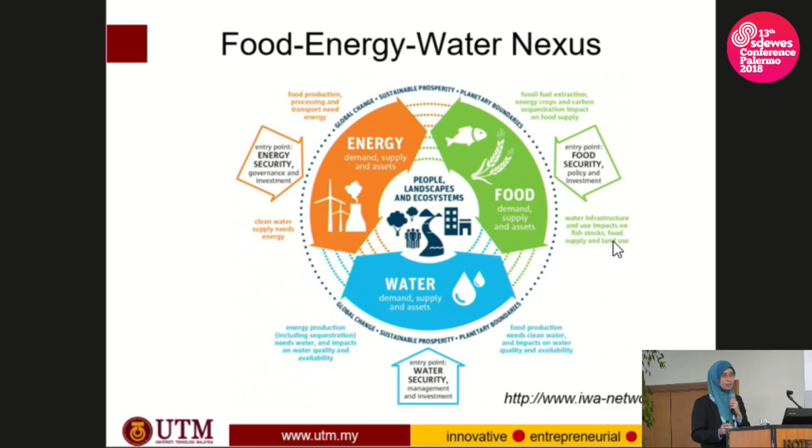Water is also very important for all food products, for agriculture, plantations, and so on. At the same time, food, like biomass, contributes to energy, and agriculture also goes back to the water supply chain. So taking care of water is also very important, because we'll also be taking care of the whole food, water, and energy nexus that many people are talking about.

So that's about the importance of water, maybe something you have heard in so many lectures. So let's look into the water cycle. How do we get clean water in the first place?

Normally we have a water supply, a source of water. It could be a river or a lake. To have clean water, it needs to go to a water treatment plant, and then after the water is clean, it will be distributed to the consumers. The water is utilized by domestics, agriculture, industries, and so on.

After water is used, we generate wastewater from the usage. This wastewater needs to be collected and sent to the wastewater treatment plant before finally being discharged back to the water sources. So these are the common water cycle steps to get clean water and how it goes back to the water source.

We mentioned there are 7.6 billion people now, and water is getting more polluted. So what could be the solution to solve water issues or water scarcity in the world? Could it be that we need more water? Could it mean we need to find more alternative water supply?

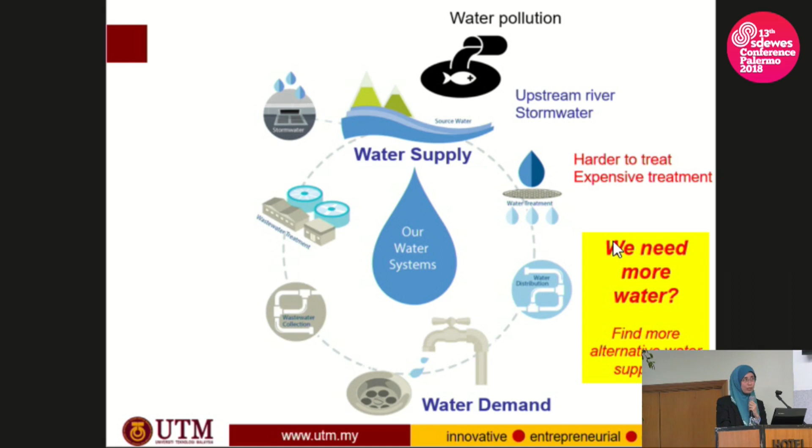If we look at water supply, it could be river and stormwater, as I mentioned. But the issue now is pollution, emerging pollutants, and many other things going into the water, which makes it harder and more expensive to treat, especially the emergent pollutants. Sometimes we throw antibiotics and other things into the water, which is very hard to treat. We have superbacteria and so on, so many things to consider when water is being polluted.

People also look at other alternative water sources like groundwater. Groundwater is a good alternative, but if you over-extract it, you incur long-term problems in the future, because water is actually being replenished inside the ground. When you extract too much, it doesn't go back to the river, and you'll have long-term problems with plantations, and then holes forming in the roads and so on.

People have also been talking about desalination, another famous technology. Desalination is great, you can use seawater, which is very abundant, almost everywhere. But the problem with desalination is energy. It's very energy intensive, requiring about 8 to 10 times more energy compared to treating surface water.

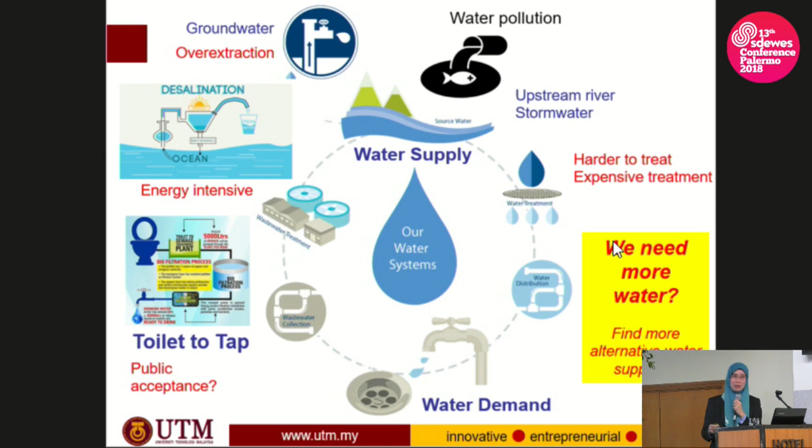Another alternative water source people talk about is wastewater reclamation. Maybe you've seen the advertisement where water is flushed from the toilet, goes to treatment, and then suddenly it comes out of your water tap and someone is drinking it. This is wastewater reclamation. It's good, but the problem is public acceptance - not many people, after seeing water flushed down the toilet, have the nerve to drink reclaimed wastewater. So although it's cheaper compared to desalination, the public acceptance may be lower for this wastewater reclamation.

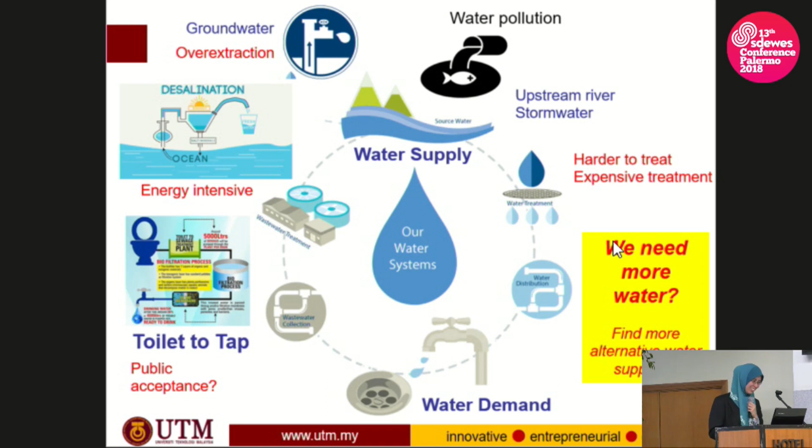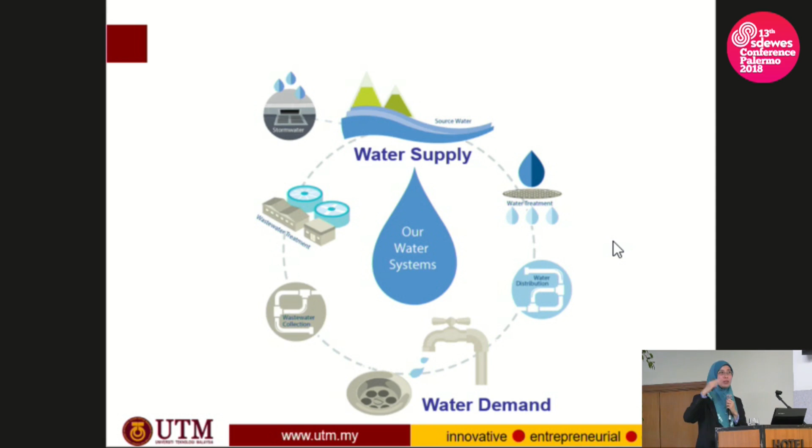Okay, so we talk about water supply. We have growing population, all the products need water. And we have so many water supply technologies which I have mentioned, but water supply is only one part of the story. The other part is the demand side. You can have all the alternative water supply, but in the first place maybe you do not need that much water supply. Maybe you can try to reduce the required water consumption for all the products first, so that you don't need to build such a big desalination plant or reclaim too much wastewater.

So water demand management is very important, and you have to consider it when you are doing planning. Don't just plan building a bigger desalination plant and so on. Plan also what you should do in order to reduce the water demand side as well, from the consumer perspective.

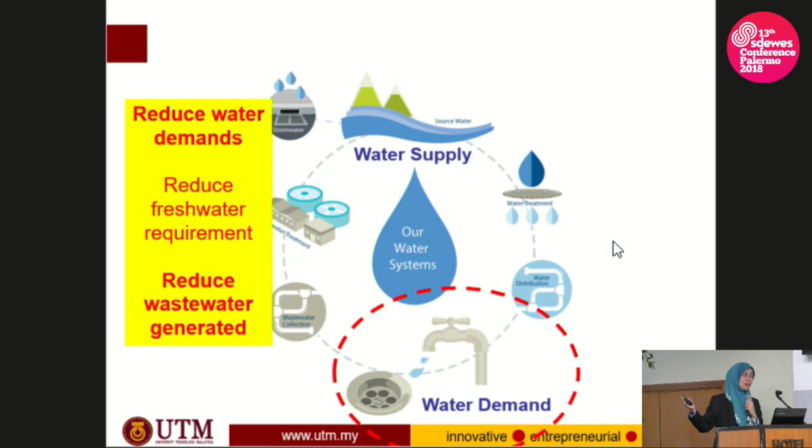So what can we do? We can leave it to the government. We can let the government build a desalination plant for us, and choose whatever technologies are great for the country. But the problem is, let's say they do go for a desalination plant, it also means your water tariff will be higher. If your water is from surface water, maybe it's still very cheap, but when we move towards desalination, it will mean we as consumers have to pay higher water tariff.

So more money going out from our pockets. In another sense, if we let the government take charge, of course they want to reduce wastewater pollution to the rivers, seas, and so on. So we will have more stringent regulations. The wastewater treatment plant may need bigger capacity, you have to treat it to more stringent standards, and so on, and it will incur more capital investment to the industries.

And the problem again is climate change, something we have to plan for from now as well. What happens if the surface water dries out, for example? So what should we do? Sometimes what are the alternatives that we can have to make sure our water supply is reliable instead of unreliable because of climate change effects and so on.

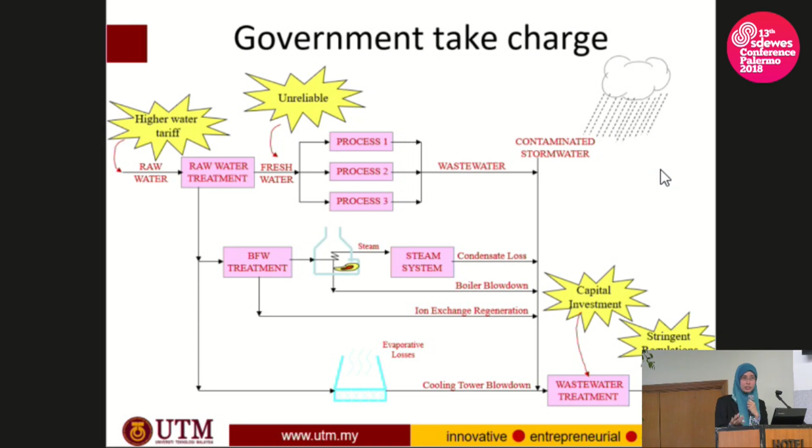Okay, so let's talk about the demand side. Let's say all of us can play a part, not just leave it to the government to build the desalination plant or whatsoever. So what we as consumers should be doing - of course the easiest one is to change our behavior. In the first place we should try to save water. Maybe when we are brushing our teeth, we have to close the tap and so on. Try to reduce water as much as possible. Try to educate our children, our students. Most of us are lecturers or researchers here, so try to educate the whole community on the importance of saving water.

But another difficult thing - we can try to preach people to save water, change behavior, and so on, but sometimes changing behavior is not so easy. It's easier to control a machine compared to controlling someone and saying, you must do this. If you have children, you understand it's not easy to change people's behavior. So we need to instead use technologies. We need to design our system, because behavior change is good to do, but we also need to think how to design our system in order to enhance the water demand reductions.

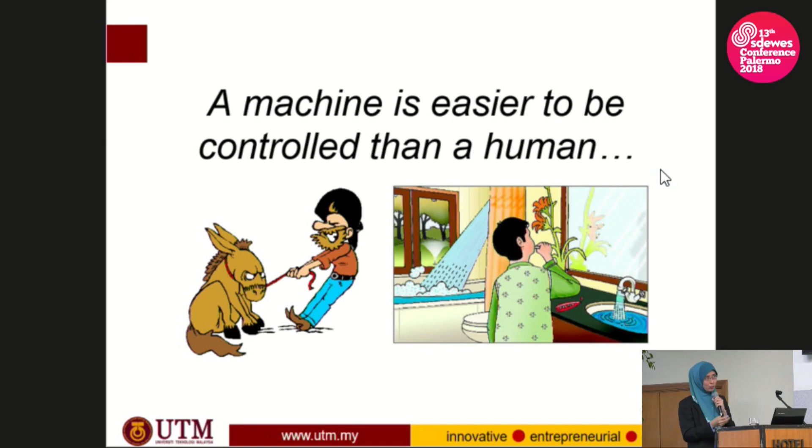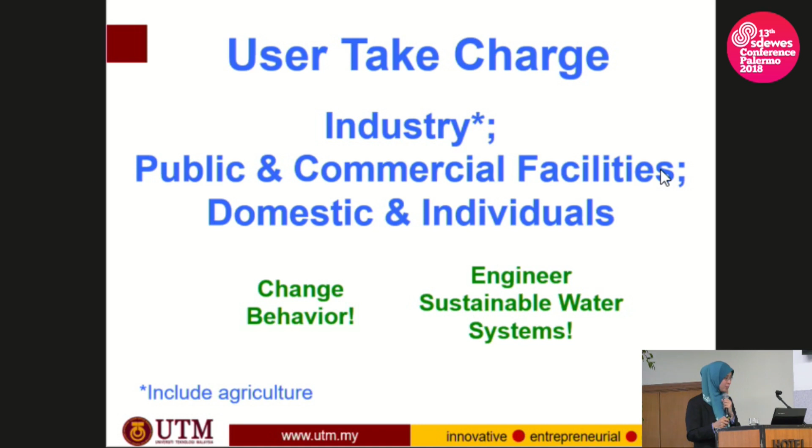Okay, so how do we engineer a sustainable water system? That is the next question we are going to address. I'll be talking from the industrial perspective, because in my field of work I work a lot on how to reduce water from the industries, but you can also implement this for other facilities like buildings and so on.

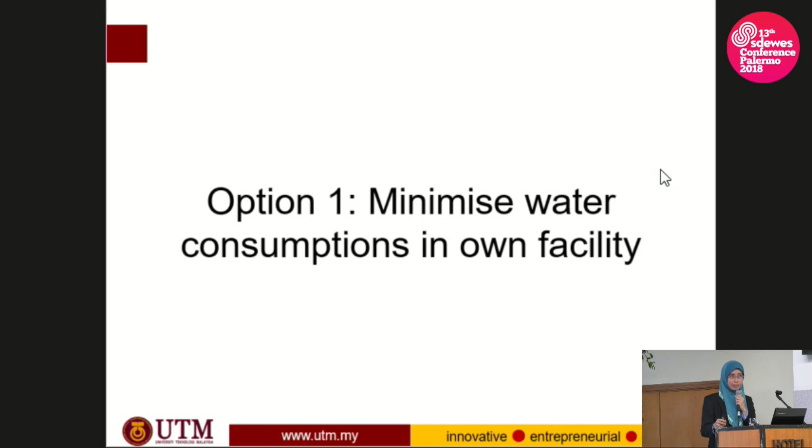And when you hold the feet, maybe you think it's a tree. So it's very important that when you want to reduce water, you should not look from one angle or one perspective only. We should always look from the bigger picture in order to find the actual problem or situation.

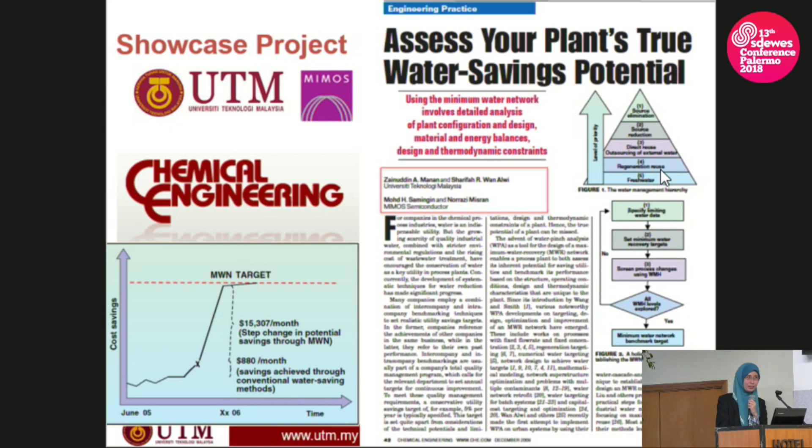We have published some work on how to minimize water holistically in the Chemical Engineering Journal, and also have some books. If you're interested, you can read the books or the magazine. So what is the concept I want to highlight here?

We have the water management hierarchy, which can be used to guide water minimization. So what is the water minimization hierarchy? First of all, it has water reuse. If we can reuse water - let's say you use water from the kitchen, after the water comes out from the kitchen, maybe you use it to water your plant. So this is an example.

So this kid, after washing the hand, the water from washing your hand is actually not so dirty. So you can consider using this water to flush the toilet. Why do you need clean water up to tap level to flush a toilet? Do you really need it? No, right? You don't need clean water for everything. Some things you can use second-grade water, or water with a bit of contaminants, but it can still be used for the processes. So this is a very good example.

The second thing you want to consider to minimize water is source and demand manipulation. How can you eliminate or reduce water in the first place? Maybe, for example, this is a composting toilet - it does not require water at all. Previously, if you use the old toilet, it used about 12 liters per flush. Now, with a dual toilet, maybe you use 4.5 liters per flush. But if you go into composting toilet, you eliminate water totally. So there is a way where you can manipulate or minimize water by changing your technologies - maybe change to composting toilet, go for aerated flow water tap, and many other things. So these are source and demand manipulation.

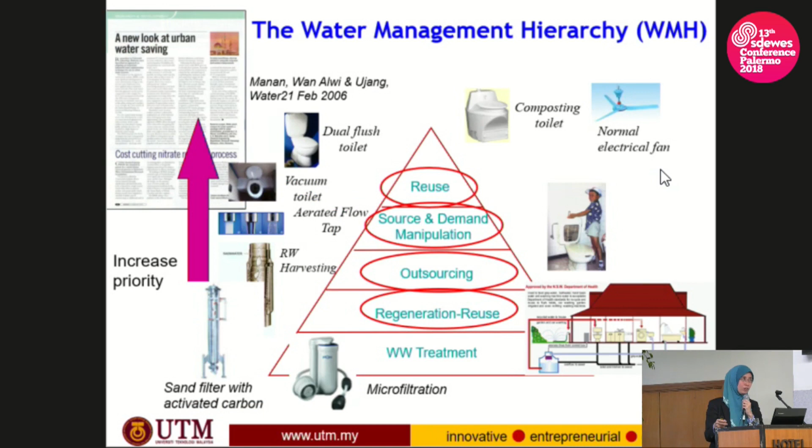Okay, so next thing. It sounds very familiar - like the 3R concept: reuse, reduce, and so on. So this is so simple, I can just use common sense to solve this problem. But the problem is when you have, for example in industries, so many water streams. Even domestically, you use water for so many things. So you have so many processes which use water, and at the same time, so much wastewater coming out after the water is used in the processes.

So if you want to reuse water, sometimes you have to know the contaminant limit of that water. If you want to reuse from ablution to washing car, you have to see if you can reuse it directly, or if the contaminant level is higher, maybe you have to mix it with other water sources which are cleaner, or even mix it with fresh water before you can utilize it for a process. So there are actually some calculations you need to consider before you can do water reuse.

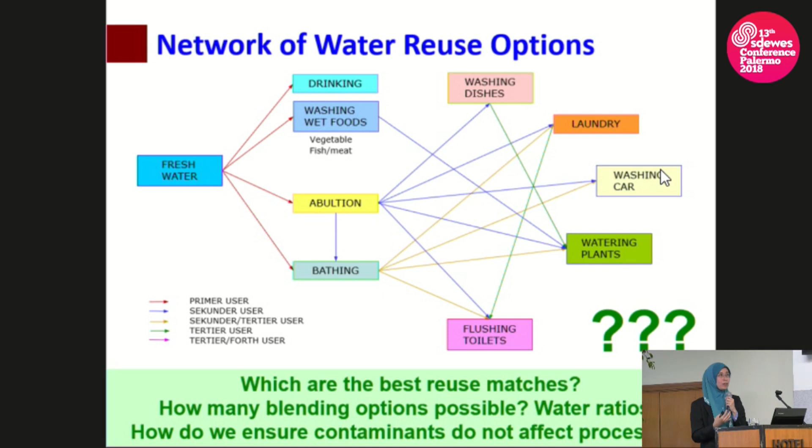You need to know which one is the best reuse match. You need to know what the blending options are, what the ratio of mixing should be, and how do you ensure that the contaminants - if you're using it, for example, to wash your clothes in a laundry - are not affecting the washing machine performance. It doesn't cause fouling, for example, and doesn't affect your equipment. Or if it does affect your equipment, what are the maintenance or operability considerations you need to make?

If you talk about water management hierarchy, there are so many options. You can change the water tap to so many different technologies. If you have a toilet, you want to change your toilet to vacuum toilet, composting toilet. So there are so many options that you can do from all the water management hierarchy angle.

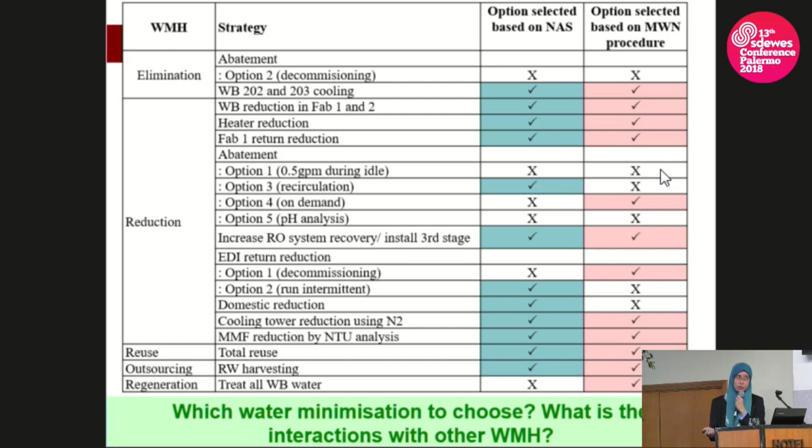So the next question is, which one of the strategies or technologies should you choose for your facility? And another important one is, of course, economy. You may want to reduce water up to zero, but it may not be economical because the technology will be too expensive and you may not have the budget for it. So we need to find a trade-off. It's good to save water, but also what is the cost, and which one should you prioritize? Maybe you can go for no cost and low cost first before you go to the higher cost measures. So we need to find ways to minimize water holistically and systematically.

System approach is one of the best ways to address this. You have so many constraints, as I mentioned just now. So we need to look at it from a systems approach.

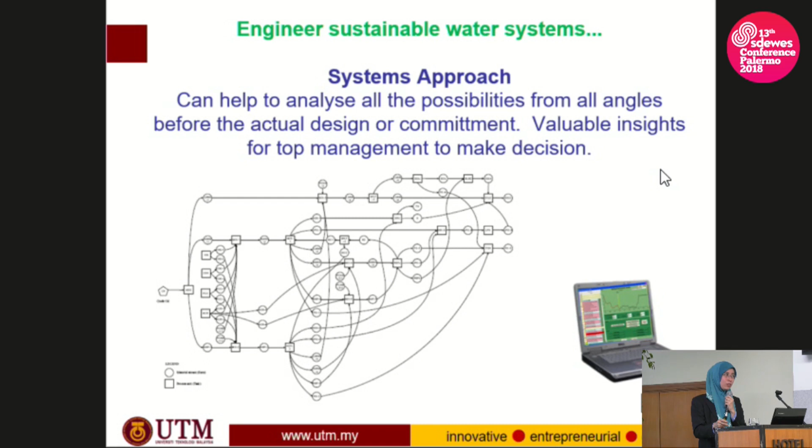For system approach to water minimization, there are two typical approaches. One is the insight-based pinch analysis method, which uses graphical approach or numerical tools. Another one is the mathematical modeling tool. Both have their own pros and cons and their own strengths.

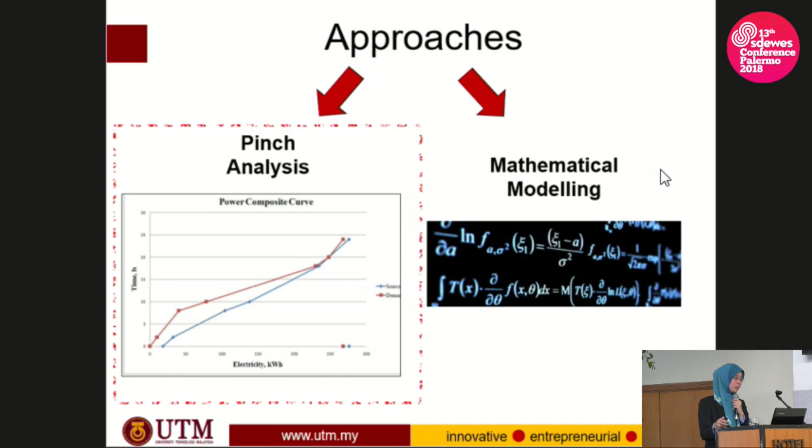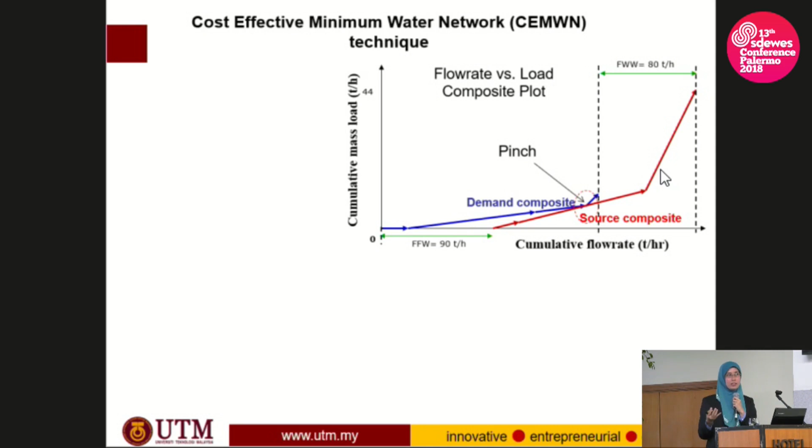So pinch analysis, I have done quite a lot of research in this area. One of the methods our research center has introduced is what we call the cost-effective minimum water network technique. It doesn't require any modeling, you can just solve this by using Excel. It's also made from simple graphs, so when you plot it, if you are proposing to an industry, it's very easy to explain to the industrial people why the water reduced, why you should select this technology, how much is the blending options, and so on. So we can use the water pinch technique, which is cumulative mass load versus flow rate.

From there you can plot all your water demands and water sources and determine your potential fresh water needed and wastewater target. The good part about this graphical approach is you can also use it to guide the selection of water management hierarchy that I mentioned just now. So when you have options to eliminate, reduce, outsource, or regenerate, let's say I eliminate something from the demand, what will happen to my freshwater target?

When I harvest rainwater, for example, I will have more water sources. So what happens is this source line will become longer. So will it reduce my fresh water, or maybe it will increase my wastewater instead when I harvest more rainwater?

And if I want to regenerate or pre-treat some of my water, for example here, my water source is too contaminated, but my demand requires cleaner water. So I may want to treat part of this wastewater source to be a bit cleaner in order to satisfy this water demand, so that I can reduce my freshwater targets.

So water pinch is a very powerful tool, especially the graphical pinch, because it can give you insight based on what happened when you do this and do that.

But of course, the downside of pinch is it can only cater for a single contaminant system, and the problem is when you have a multiple contaminant system. But it can still be solved by using pinch if you take into consideration zones, and then you take, for example, the highest contaminant limit. There are ways to do it actually.

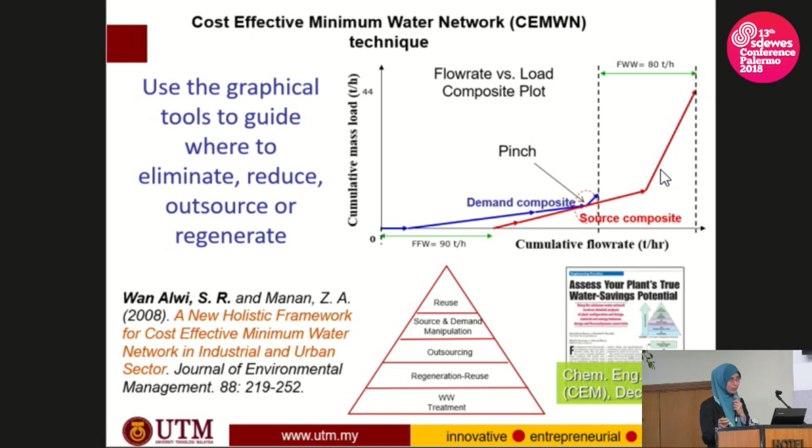Okay, so cost is also important. Our group have also introduced a method where you can screen the water management hierarchy by using a tool we call the systematic hierarchical approach for resilient process. Again, it's a simple graphical tool, investment versus annual savings.

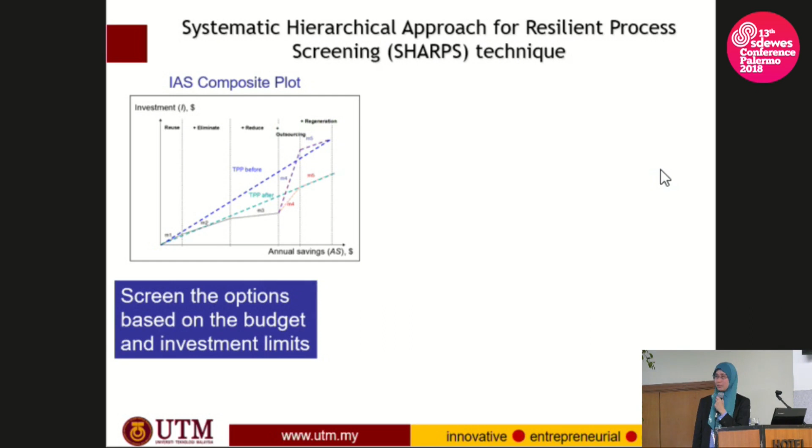By using this tool, you can target, for example, let's say the first technology that you choose saves a lot of water, but the cost is very high as well, the investment is very high. So you want to check what should be the next best technology. Maybe it won't save water as much as the first technology, but the cost might be cheaper. So by using this curve, you can have your payback period target.

Let's say this payback period initially was 10 years, and your target is 2 years. So you can plan: okay, I should not be using this technology because it's using too much investment with too little savings. I should change it into a lower investment technology, but maybe it gives less savings. But at the same time, I try to maximize everything in order to achieve maximum savings with the limited investment we have.

So SHARPS is a very powerful tool if you don't want to go into mathematical modeling to do cost screening. It's an interesting method, and if you're interested, you can read about it in this journal.

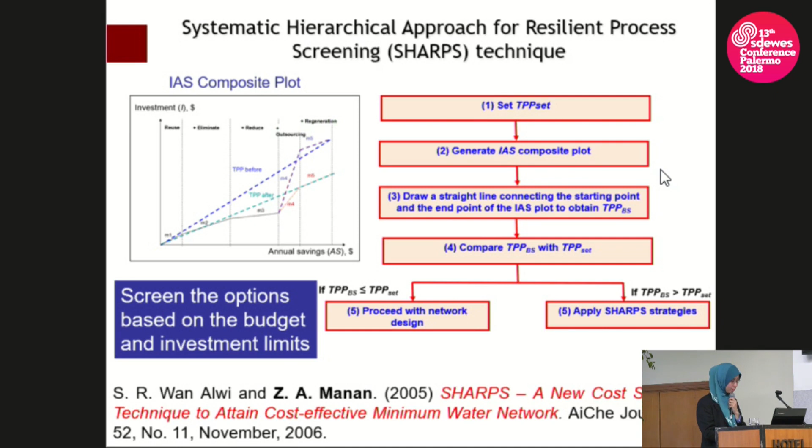Mathematical modeling - I believe most of you are experts in this, maybe some of you are doing research in it. It's also a very powerful tool. You can put all the constraints in there. We have also done some work in this area from the water management hierarchy, so you can use mathematical models to solve this problem.

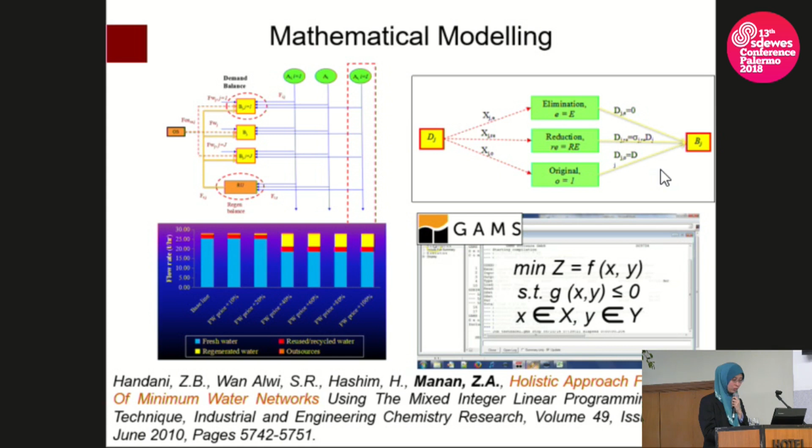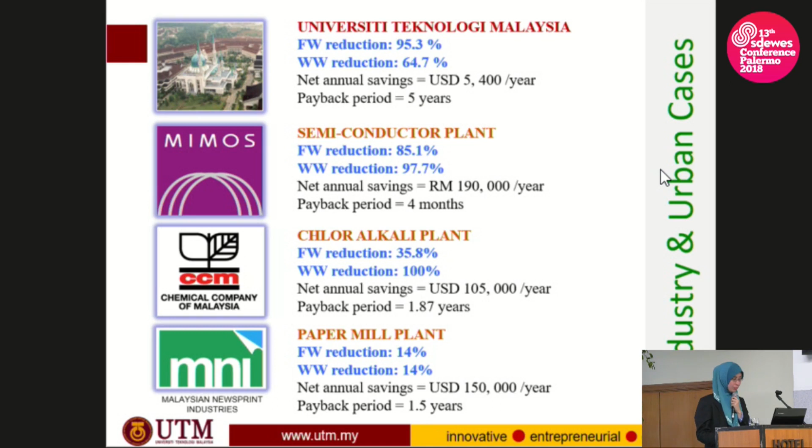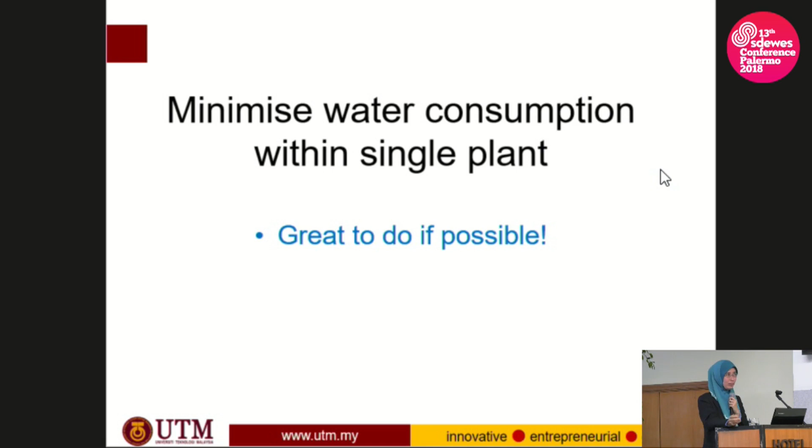Okay, next question that I want to throw out. Water reuse that I mentioned just now - if we can do it for a single plant or maybe for your building, it will be great. It will be very great if you can recycle or reuse water from one process to another.

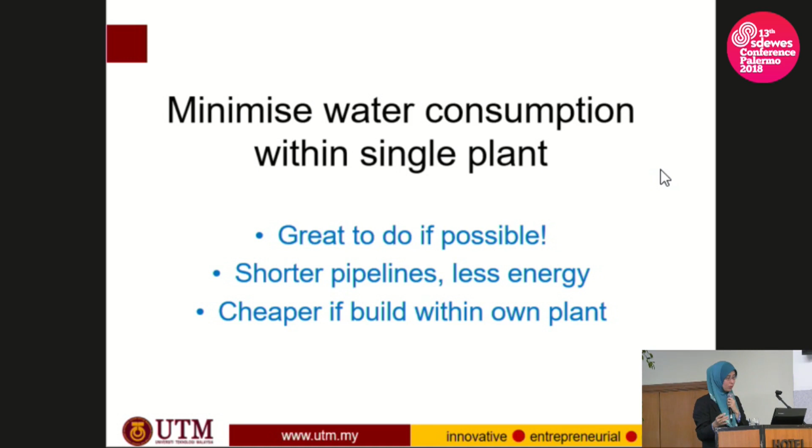And the good thing is, if you recycle something - for example, let's say this is La Torre Hotel - we recycle the water from bathing, let's say the water from the shower. We collect the water from showering and then use it to flush the toilet. So if we can utilize water reuse within this hotel, it will be great, because it means the pipeline is only within this hotel, and it will be cheaper if you build it within the hotel for the pipeline, the pumping, and so on. But the problem is...

Sometimes there is no economy of scale. Sometimes some places have a lot of wastewater, but maybe it's not so clean - maybe it's highly contaminated. So they do not have wastewater which they can reuse. And let's say they have some others, but maybe the flow rate is so small. So let's say there's another plant next door which has higher water quality, which they don't use for themselves - maybe they can actually send it to the plant next door.

So a reason that water reuse may not be possible for a single facility is probably because there's no economy of scale, no suitable water streams which are suitable to be reused, and another thing is maybe no expertise. If you want to reuse water, you need experts who can advise you - what will happen, is the contaminant limit suitable, will it affect the process, what will be the cost involved, what will be the risks or sensitivity you need to analyze.

So if La Torre Hotel, for example, wants to implement this water reuse, but they don't have the expertise because they're not researchers, they might be scared to go into these water reuse schemes.

So the next question I would like to pose is: let's say we have a lot of buildings or industries which are nearby to each other. Maybe instead of every building having their own water reuse system, we can consider centralizing the water reuse system instead. So how do we do that?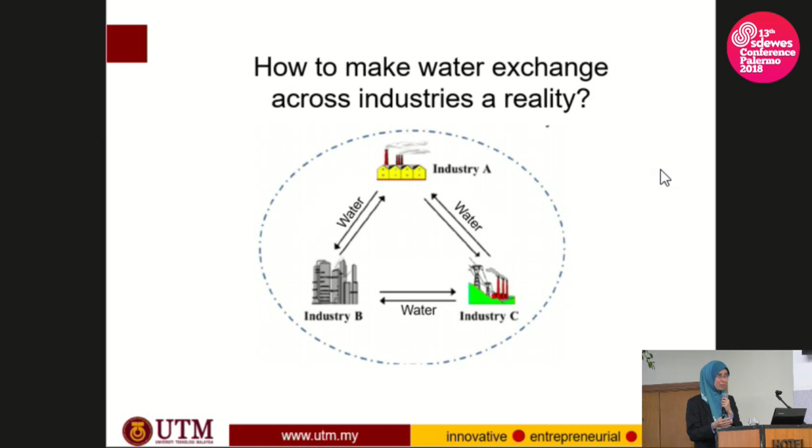That is the next main challenge that we need to address. There is a famous concept called Eco-Industrial Park, EIP. According to it, the waste from one company becomes a resource for another company. UNIDO has a guideline or booklet on how to do Eco-Industrial Park planning. Worldwide, I have checked, there are about 250 industrial parks which have actually integrated their resources among each other. So if you want to reuse water across industries, it's possible, and it's part of the EIP concept.

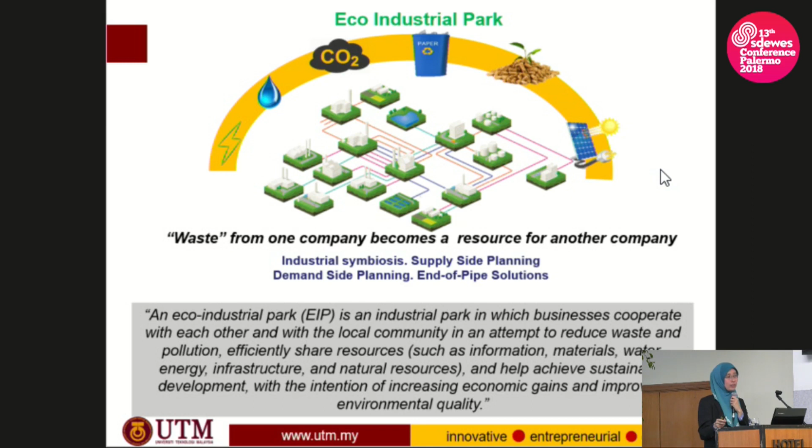Okay, how do we exchange water among industries? Let's say I have three industries. All of my plants consume fresh water in the first place, and they also produce wastewater. So I have industry 1, industry 2, and industry 3, which is nearby. I want to exchange the water, I want to reuse the water. So maybe this water from plant A, I want to send it to plant B, or maybe I can send it to plant C. So is it the way that we should make all these small pipelines?

For example, from this process, I send it to plant A, and then from plant A, I send it to plant C. This is not very practical, because it means you have small pipelines with small flow rate. And imagine if you have a small pipeline with small flow rate, you need to pump it from this plant to the next plant. So it's not going to be very practical. You don't want to do small pipelines, connecting one process from one industry to other industries, because this means more pipelines, more pumping, and it's not practical and maybe not feasible because the flow rate is too small and the capital cost will be high.

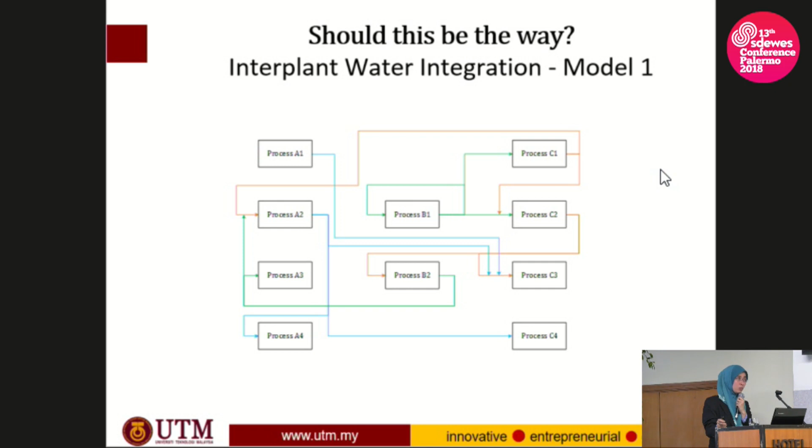So one is the problem. You don't want to do water integration among industries using small pipelines because it will be too complex, too many pipelines, and there will be a lot of long pipelines that you have to consider. Another important issue is who's going to pay for building all the pipelines and all the pumping. So let's say these three plants decide to work together and exchange their water reuse. Who's going to invest in building a pipeline from plant A to plant C, or plant C to plant B, and plant C to plant A back, for example?

So the issue will be who will be investing in building this pipeline. And let's say they need to have a pump, so there will be an operating cost to power that pump. Who's going to pay the operating cost of this pump? And let's say something happens, who is going to do the maintenance of the system? When you are doing industrial symbiosis, it's maybe possible if you come from one mother company, but let's say these companies are not interrelated with each other. It's very hard for them to discuss, okay, I have some water which can be reused by you, so let's exchange water. It's going to be hard for them to come to terms on who will pay, how much can be transferred. And another important thing is, will they want to share their information?

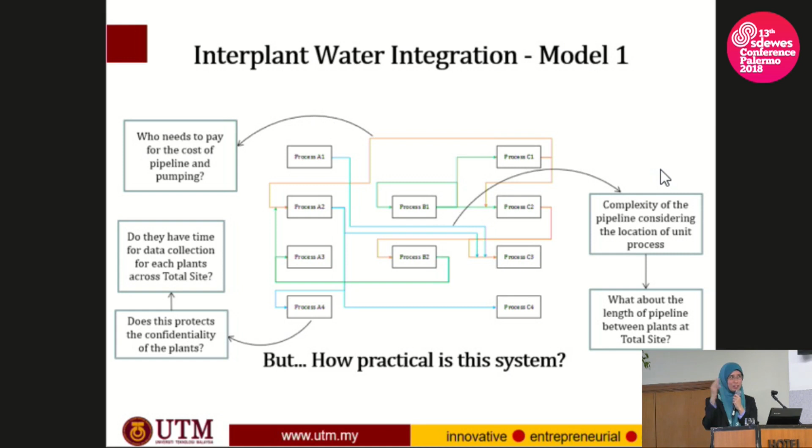So another possible model I want to discuss here is, is it possible for us to propose a middleman instead, who can help collect the data, who has the expertise, who will meet all the plants and do the negotiations? In that sense, if someone needs to sign the non-disclosure agreement, it means only one person will sign the non-disclosure agreement with the companies. And all the other companies will not know the other people's data. So only the middleman collects the data and keeps the confidentiality, and so on.

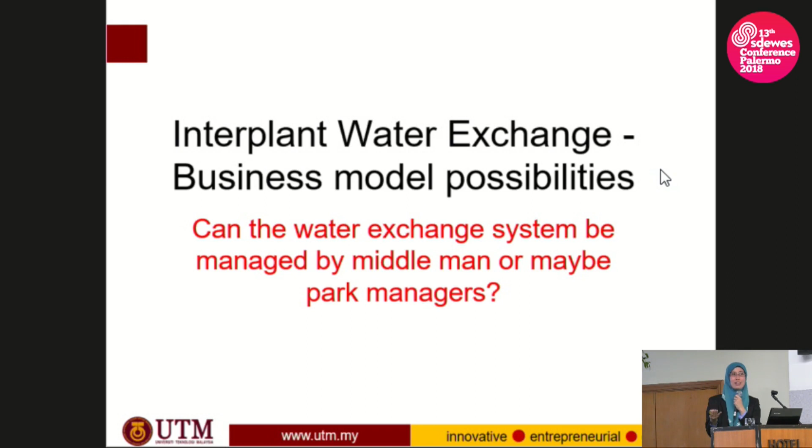Okay, so maybe you are familiar with feed-in tariff or net energy metering for renewable energy. So what we are proposing here is something for water instead.

For renewable energy, it's quite common that you have a surplus of electricity. Maybe you have a solar PV at your house, so you want to sell it to the grid. And when you have a deficit of energy, you can buy from the grid.

So imagine we can do it also for a water reuse system. Let's say we have a set of industries, and all these industries have wastewater with different quality. Let's say I have quite good quality wastewater, maybe the purity is still very high and it can actually be reused. What we can do is maybe have a water meter for the water reuse and sell it to a centralized water reuse header.

This centralized water reuse header will be managed by a middleman. The middleman will go to the industries and do some audit, to see which wastewater stream has high water quality that can be tapped into this centralized water reuse header.

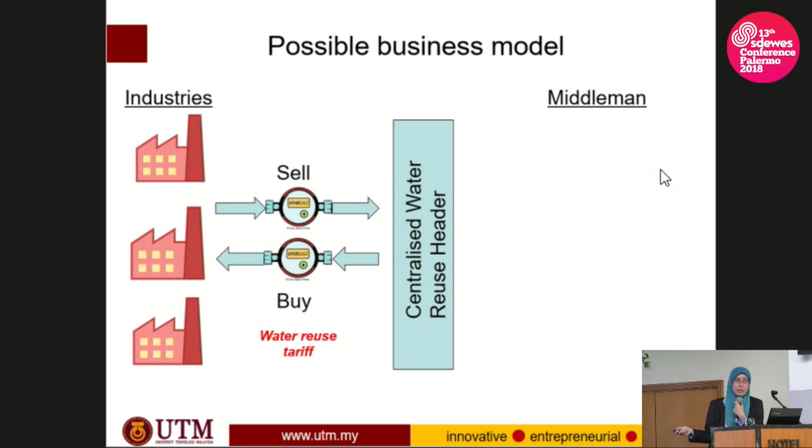They can also have several headers. Maybe one is within this range of contaminants, another is medium purity, another is very high purity, and all these centralized headers can have different water purity and different water tariff. So industries that do not need fresh water can consider buying from the several water headers that they have, and when they buy this water, they can buy it at a cheaper rate compared to buying clean tap water.

So what's the benefit of having a middleman to manage your centralized water reuse system? The benefit is, like I mentioned, you can protect the confidentiality of the industries.

Second, they are the ones that invest in the piping, the pumping, maintaining the pipelines, making sure that everything is okay, that the water quality standard is being observed, and handling any fouling or issues. So when you have someone managing the system for the industries instead of the industries working it out themselves, it becomes a business model.

They also have the expertise, meaning they already know how to properly exchange and recycle water. If you have certain contaminants, how do you handle it, what kind of water is acceptable, and so on. They are the ones that do the quality assurance, making sure the service is provided to the industries.

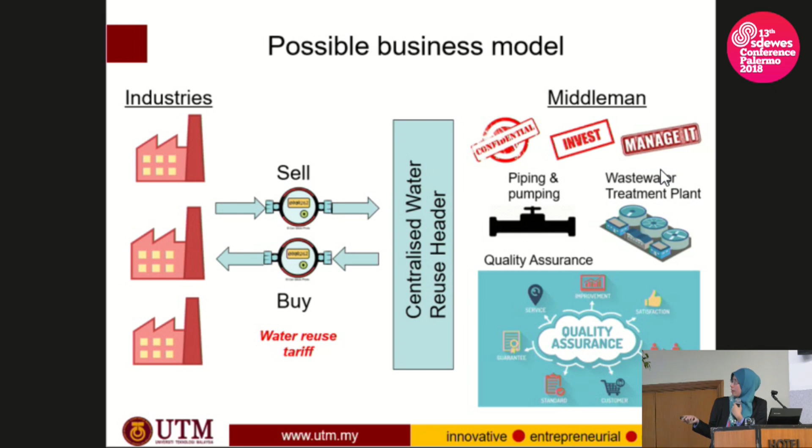And if there is any fluctuation, suddenly this plant shuts down. Before this, maybe this industry supplied water reuse, and then suddenly it shut down. So what could be the backup plan? By having a middleman concept, we can make sure there is a sustainable business model for a water reuse exchange across industries. And I'll give you another example.

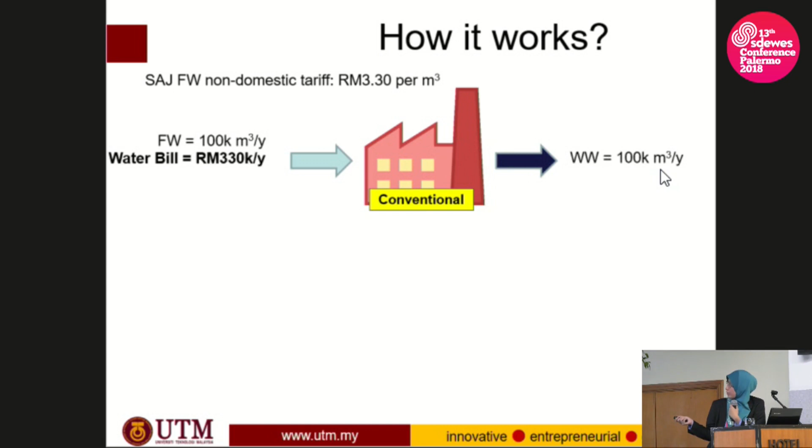Let's say now this wastewater, they don't treat it, they don't send everything to the wastewater treatment plant. Maybe they segregate their wastewater, so some of it is cleaner. The cleaner wastewater that they segregate, they will sell it to the centralized water header.

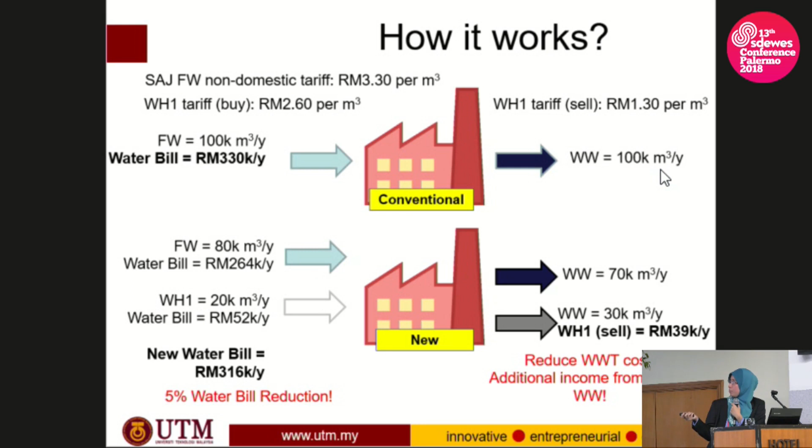So the centralized water header can buy the wastewater from the industries at this price, meaning this company can now generate some income from selling their wastewater. At the same time, before this, they bought all their clean water from the utility provider - now they only need to buy 80,000 meter cube of water, and the other 20,000 they can buy from the second quality water reuse header.

So this water will be cheaper, selling at this price. What happens is they will have a reduction in their water bill, and at the same time they can generate income from selling their wastewater. The middleman managing it can also take some profit from this buying and selling of water. So this is the concept of centralized water reuse managed by a middleman.

We can also think of feed-in tariff, like for renewable energy, but what if we use it for water instead? So maybe we have a feed-in tariff for water instead of a feed-in tariff for energy in the future, in order to promote water reuse across industries.

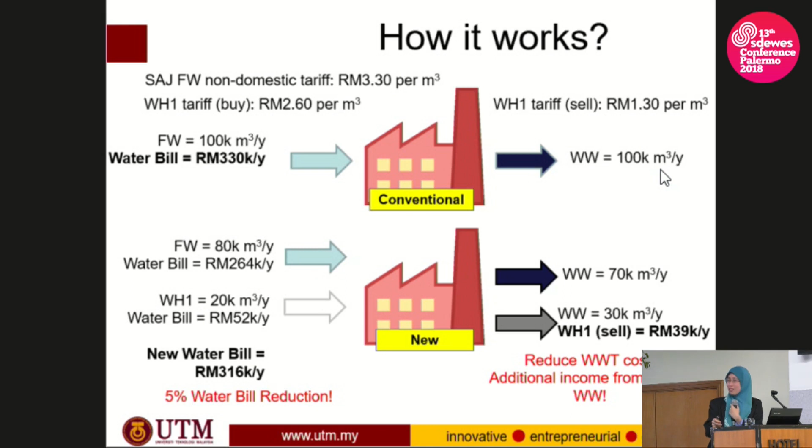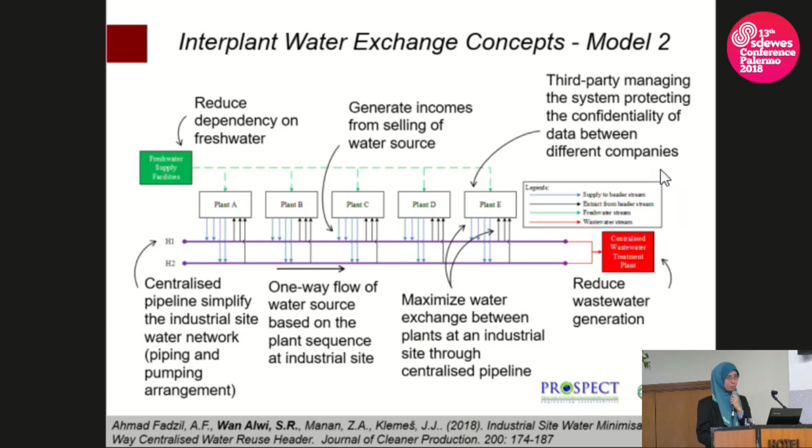So we have done some research in this area. There are a lot of models on how you can exchange water across plants. Among them, maybe you can use a one-way header. For example, let's say I have a very long stretch of road, so I have one long pipeline. The pipeline will pump water from plant A to plant B to plant C, plant D, and plant E.

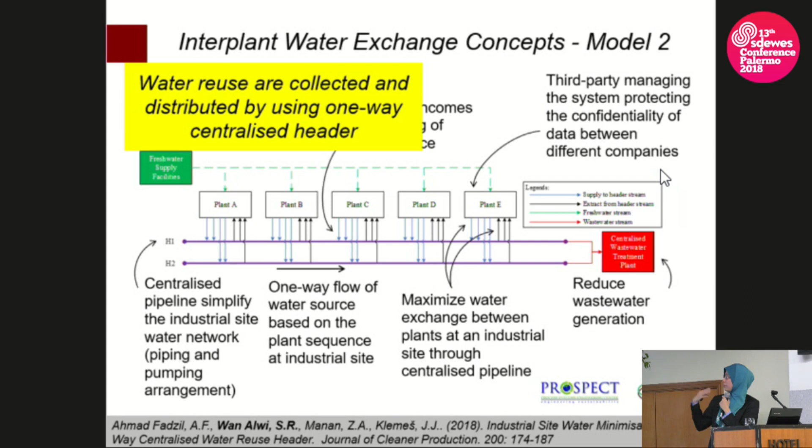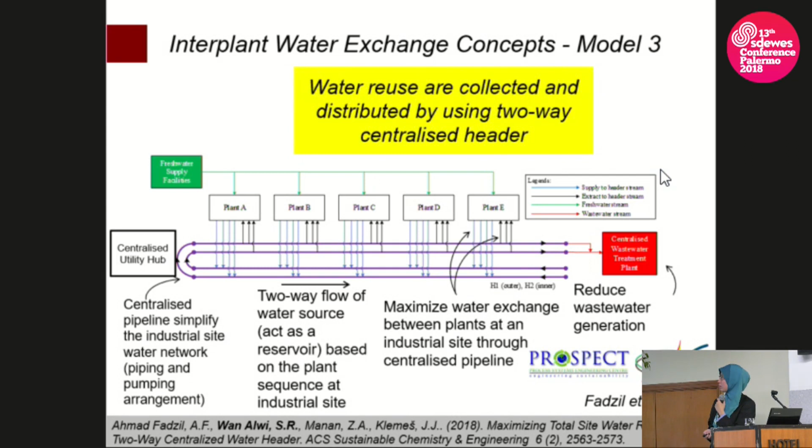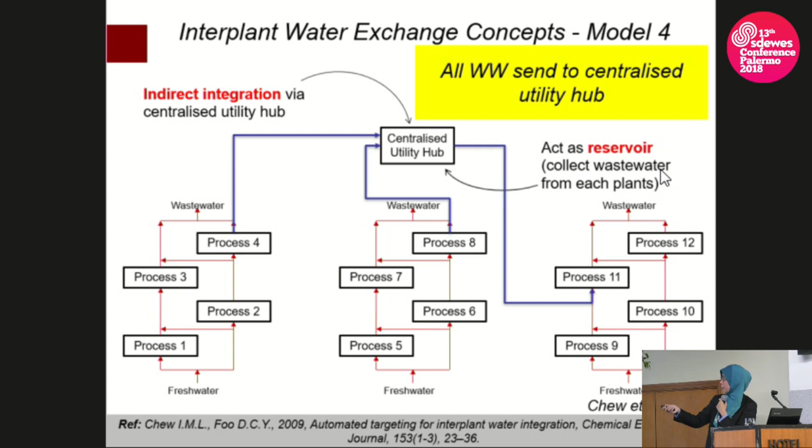And there are also other models introduced by other researchers, like by Chew, 2009. They propose some centralized utility hub. So let's say there are three different industries—all of them pump the water to this centralized utility hub using different pipelines. And then, when they want to buy water, they can buy it back from the centralized utility hub.

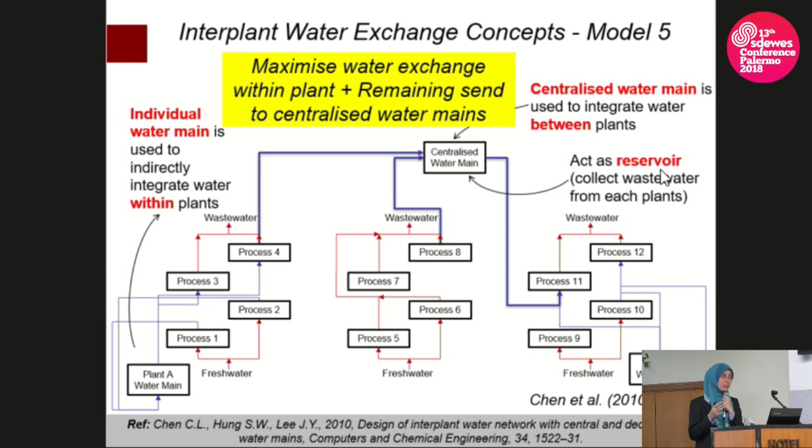Another model is they maximize first the water reuse within their plant, and then when they have some remaining water which they do not use, they send it to the centralized water mains. And there are still other researchers doing this for batch processes, adding some regeneration units, and there are just so many centralized water systems you can look into if you're interested.

Okay, so the challenges are like, in Malaysia, the water tariff is still very cheap. And when water tariff is very cheap, it's very hard to drive water minimization projects like water reuse, because the capital cost—maybe the payback period is 30 years and so on. These are among the challenges. Even though we know water scarcity is real, if water tariff remains low, that will be a challenge for people to invest in this kind of system.

Second, if you want to go for water reuse, how do you ensure water quality and continuous supply, reliability? Another important thing to consider is when you are dealing with contaminants, the safety and operability of the system.

And next one is, let's say I want to propose the centralized system to the Malaysia government—how do we convince the government or the stakeholders on the business model or the benefits of the system? So all these are challenges. And as the previous plenary also mentioned, we should not only be looking at the technical side, we should also think of stakeholders, social acceptance, public acceptance, and so on when we are doing our technologies.

Okay, so I've talked about this. These are possible research directions if you're interested. We can look into more detailed system engineering, modeling, end-of-pipe planning, risk assessment, economics. We can do a lot of regulation planning, maybe see how we can work with the government—what kind of subsidy the government can propose, maybe within 10 years give a special tariff for water reuse, and then after that maybe eliminate the tariff step by step, just like the feed-in tariff.

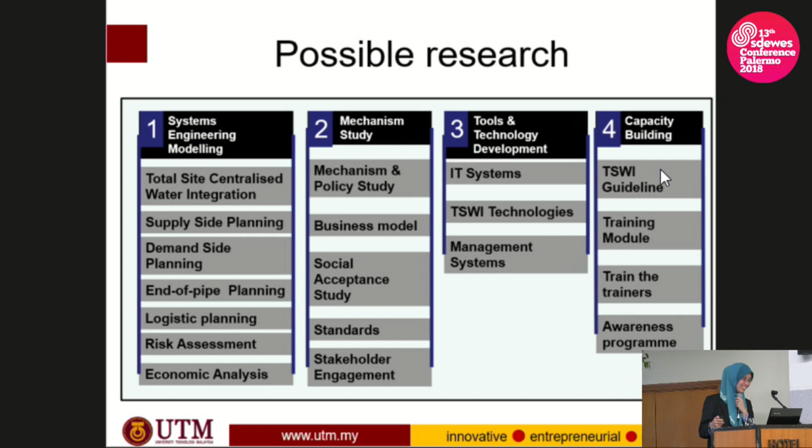So the key take-home message is water shortage is one of the world's biggest risks, and we need to engineer water sustainability. If we can train people or change people, that will be better. But if not, we have to engineer the water system.

And when we engineer the water system, we should not look at one angle only, like reuse only. We should also look into elimination, reduction, regeneration, outsourcing, and other technologies possible to reduce the water demands. And finally, water minimization. If we can minimize it within our own facility first, that will be the first priority.

But if it's not possible, because you don't have the expertise and so on, maybe we can also think how someone can propose, for example, interplant water exchange with a business model, like I showed with the middleman just now, and we can have a win-win business model situation.